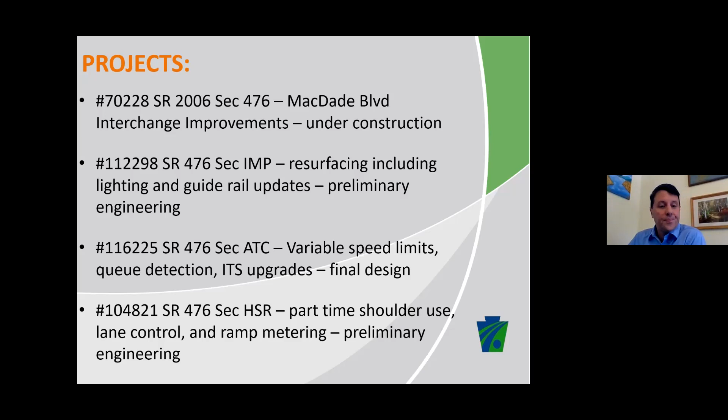All right, let's start one project at a time. First, the MacDade Boulevard project.

This project will put new signals at Bullens Lane. It will remove the northbound off-ramp to MacDade eastbound, and there'll be expansion and signalization of the northbound on-off ramp to MacDade—that's the loop ramp that comes around. Right now you can only go westbound on MacDade; there'll be an option to come to a signalized intersection to go eastbound.

There's also removal of that long pedestrian bridge, and an extension of the 3-lane section on 476 northbound past Bullens Lane—right now it ends prior to that. We're going to extend the on-ramps at both MacDade and Route 1 northbound.

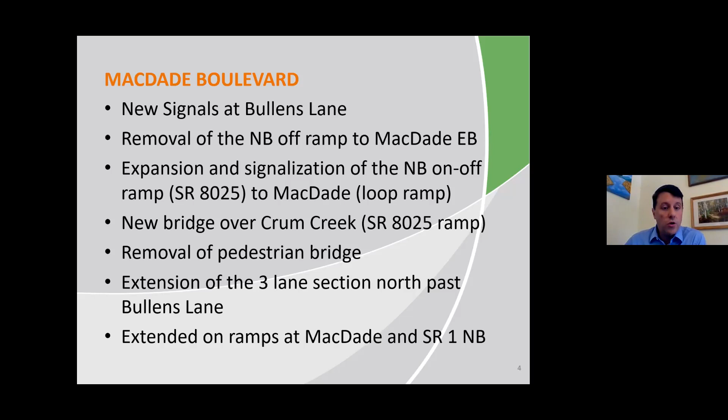So in detail—I don't know if you can see my cursor if I put it there. Okay, that makes this easier. To quickly go through what I was just talking about: the new signals at Bullens Lane are outside of this graphic, but this ramp right here is going to go away.

This big long pedestrian bridge is going to go away. This ramp is going to be expanded. Right now you can only come around and go westbound on MacDade; you'll continue to be able to do that, but we're expanding it so there's a larger signalized intersection here with MacDade Boulevard. So nobody will be able to come off this ramp, get over into the left lane, get on that ramp, and try to get around that northbound backup every afternoon. That whole thing is gone.

One benefit here is that this structure is kind of scary—a lot of people don't want to walk over it. A sidewalk will run down MacDade Boulevard, and there'll be a pedestrian bridge over Crum Creek, buried underneath here, which will connect into the existing sidewalk that goes under this other ramp and proceeds westbound.

Traffic right now has 3 lanes northbound, but the third lane ends right about here. That third lane is going to continue a little further, toward Bullens Lane—I think a bit over a quarter mile further. The idea is to let all the lane switches happen before we drop the lane. We also want to get rid of the backup that extends onto I-95, sometimes both northbound and southbound.

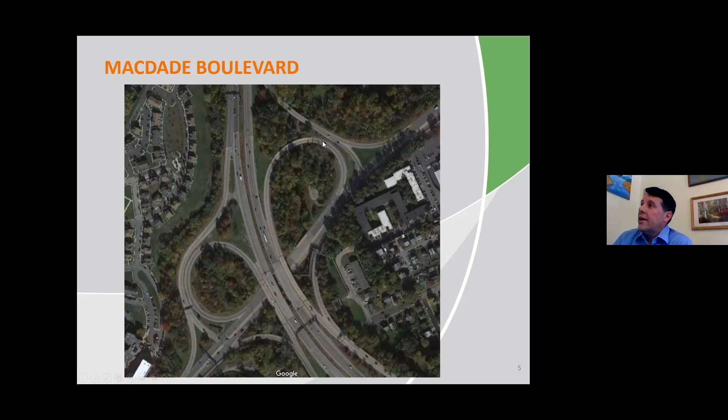The benefit here is that in the PM we should be able to reduce travel time northbound by a couple of minutes—not a dramatic change, but still a change in its own right. The bridge we're replacing is this bridge over Crum Creek. It's a 3-span, which we'll get into now.

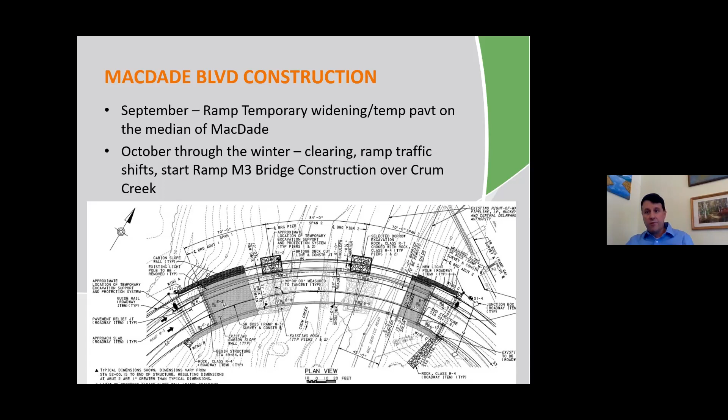Upcoming items of work: this September, we're doing temporary widening and temporary pavement on the median of MacDade, and temporary widening of the ramp. Then this October through the winter, we'll be clearing, doing traffic shifts, and beginning construction of this brand new 3-span bridge. This bridge will be a curved girder with two 70-foot spans on the outsides and an 84-foot center span over Crum Creek.

Questions so far? That's the first project, MacDade Boulevard, which is under construction now. There'll be some paving on the Blue Route that goes along with that, and other incidental construction.

The next one is 476 Section IMP—I assume that means improvement. This is in preliminary engineering now, but quite far along. It involves complete resurfacing of all lanes, ramps, and shoulders from the limits of the MacDade project—we're not going to overlap or pave the same area twice—all the way up to the Schuylkill Expressway. That covers all of Delaware County and up into Montgomery County.

We will finish the guide rail updates that the Interstate Guide Rail Project started, so all the guide rail will be updated and MASH compliant. There will also be lighting upgrades—predominantly using the existing poles and system with LED heads, but there are some gaps in the lighting that we'll be filling in.

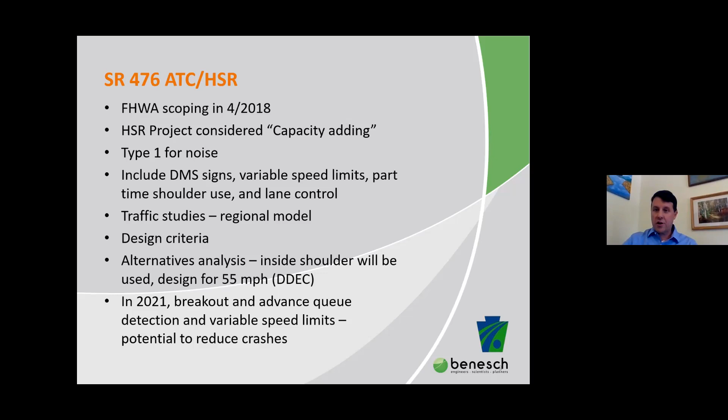During 2021, the decision was made to break out and advance the queue detection and variable speed limits because they have independent value. If we can reduce crashes and the congestion that arises from them, why wait to do the studies for HSR? Our challenge now is to make sure that what we put in for ATC isn't in the way of HSR and we don't end up moving things twice. So ATC is the advanced construction of the variable speed limits and the queue detection.

Limits of ATC are basically from just north of the Schuylkill Expressway all the way down to I-95. On 476 northbound, there will be work that will affect I-95 southbound from Stewart Avenue to the Blue Route, just because we have to warn people that the speed limit's going to change and that sort of thing.

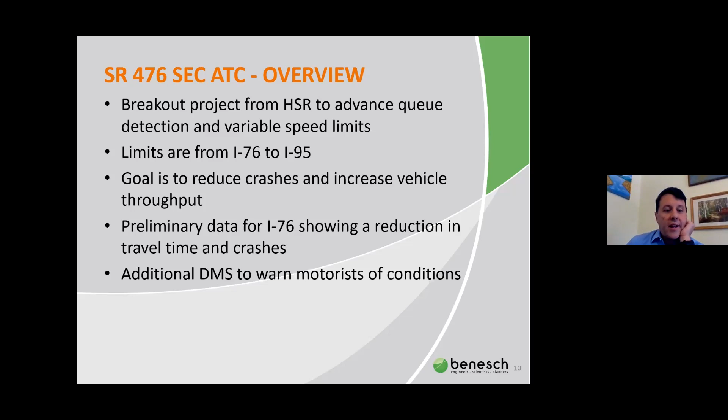Preliminary data, the department has the limits. We're up around Old Gulph Road, all the way down through Lancaster Avenue, West Chester Pike, Route 1, Baltimore Pike, and MacDade. Northbound, we start back near the Boeing interchange, which is Stewart Avenue. Once again, that's for the variable speed limits and queue detection.

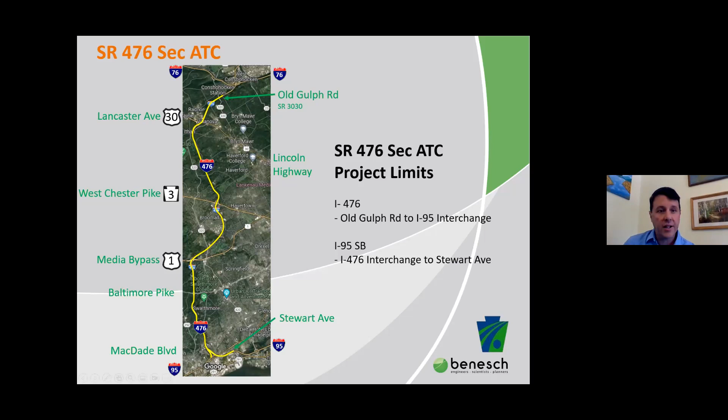What's the benefit of ATC? The design team did crash analysis. The department has lots of safety data for the Blue Route. We've got 7 roadway segments out here that have double the statewide crash rate, predominantly driven by rear end crashes, which is often due to congestion. People go around a turn and traffic is stopped, or somebody slows down faster than somebody else.

Rear end and hit fixed object crashes are 50%, as of the last 5-year count, of the crashes on the Blue Route in Delaware County.

The variable speed limits we found, and there aren't a lot of good examples of this around the country, but Georgia and Wyoming are 2 places we poked around. When variable speed limits were put in on roadways in those 2 states, they saw a 29 to 34% reduction. We are getting to the point now where we have some data from the variable speed limits that PennDOT just did on the Schuylkill Expressway.

As you all know, crashes on all our roadways are up during the pandemic. They rose, so comparing 2021 back to 2017 is difficult.

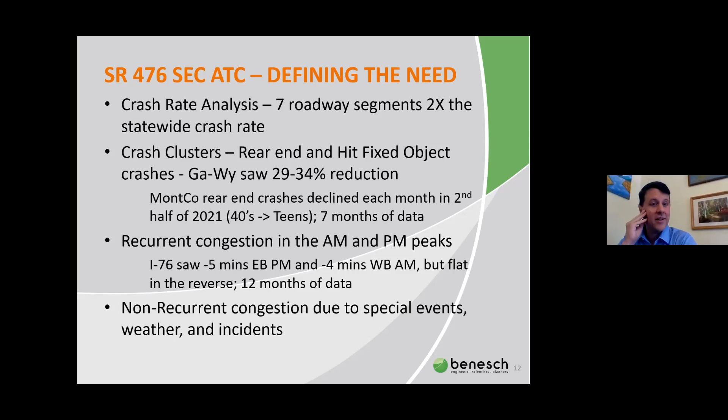Non-recurrent congestion, of course, due to special events, if the Pope's in town or the Eagles, Lord knows, ever get to the Super Bowl or something and it happens to be here. Weather incidents, that's another story.

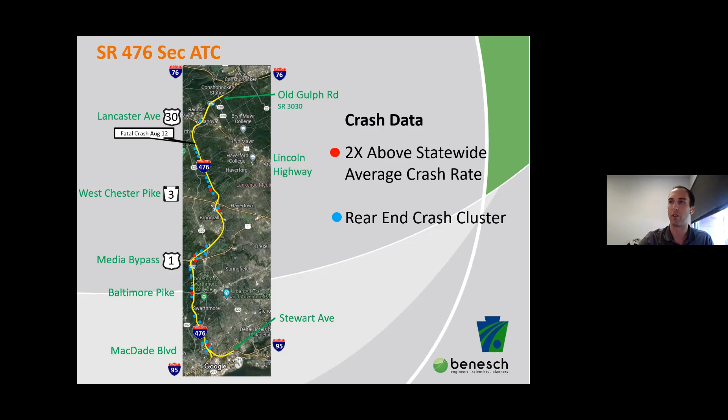So on the next slide here, we'll go through some of the system benefits. Mike touched on some of these, and the data obviously speaks for itself, for what was seen on the 76 deployment as well.

But I guess the benefit of installing a system like this is we want to proactively lower the speed of oncoming traffic coming into a heavily congested area. So with the devices we're going to deploy under this project, PennDOT will be able to tell really when congestion is building and when the density of vehicles is building.

Ahead of that area, they can lower the speed limits progressively, starting at the basic speed limit of 55 miles per hour, lowering it in set increments, and kind of avoid some of that heavy congestion that's due to a sudden change in speed and causes that stop-go condition that ricochets back into the stream of traffic.

So that's one benefit, and the other is reducing crashes, which is the big one. Mike spoke to the reduction that was seen on the Schuylkill. I think we're trying to achieve something similar here, and you'll see when I show the change in speeds on the next slide, on AM and PM peak on average for an entire year. It's pretty telling where some of these areas could use this.

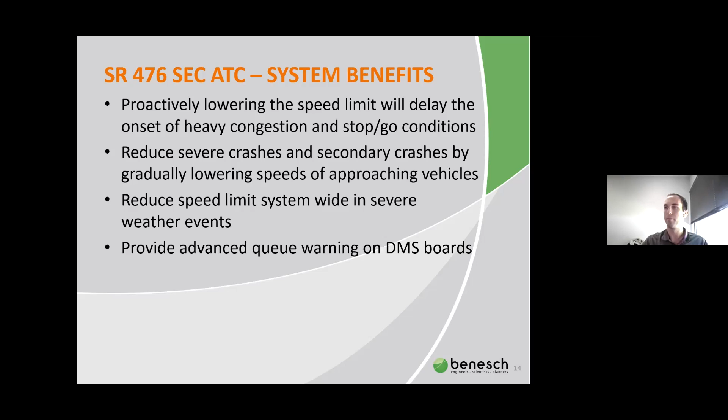On the next slide, I'm going to go through some of the congestion data we pulled for an entire year. We pulled AM and PM peak data for the northbound and southbound direction for our project limits here for an entire year.

During both peaks, for the northbound direction, we're seeing in the AM pockets of slow traffic from the 95 interchange all the way up through Route 1, with a lot more red, slow speeds around the interchange areas. But in the PM peak, you're seeing something similar down near MacDade, and the same around Baltimore Pike and Route 1.

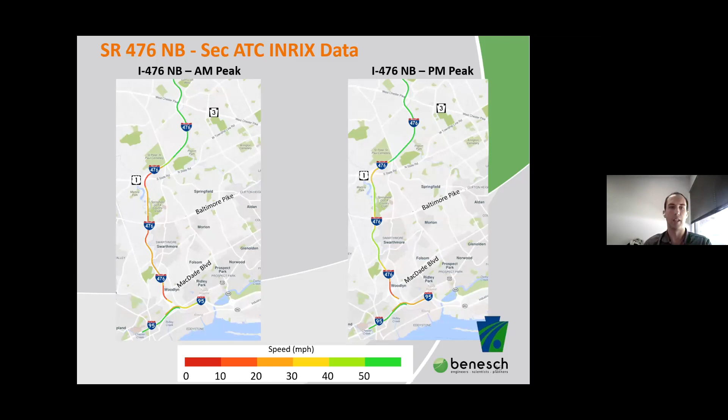And in the southbound direction, on the next slide, we're seeing southbound in the morning a slowdown near Route 1 and Baltimore Pike, but the big piece I wanted to cover was in the PM peak.

Everyone kind of knows this - on a typical day, or even a Friday, you're seeing a really significant reduction in speed as you approach Route 30 and just south of Route 30, all the way down through Baltimore Pike. That's something alarming from the data standpoint, but also looking at the crash data, you can see why there'd be a lot of crash clusters there. You have almost average speeds of 40 to 50 miles per hour, and then you're dropping down to somewhere in the 20 to 30 mile per hour range pretty suddenly.

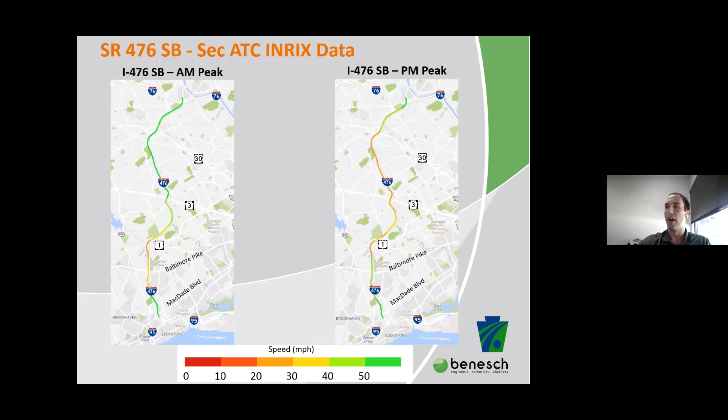So on the next slide, we're going to cover some of the deployments. Mike already covered the limits, kind of Old Gulph Road, Montgomery Avenue area, all the way down to 95, and some devices on 95 southbound.

The pink dots represent dynamic message signs that will be put out there to reinforce the message that there will be potentially stop traffic ahead or a reduction in speed limit ahead. We have them placed intermittently between some of the major interchanges. And then on 95 southbound, to warn drivers coming into 476 northbound that there may be congestion on the ramp there, or a reduction in speed limits, to be advised.

The two other devices there that we don't have shown are - there's many of them, so it would clutter up the map - but based on the limits of the project, we've identified 58 variable speed limit devices spaced at every half mile or less than a half mile to comply with the statutory requirement to make the speed limits enforceable.

And we have 35 vehicle detectors that will be constantly detecting speed and density data of the roadway, which will factor into how the speed limits are calculated and posted on the roadway.

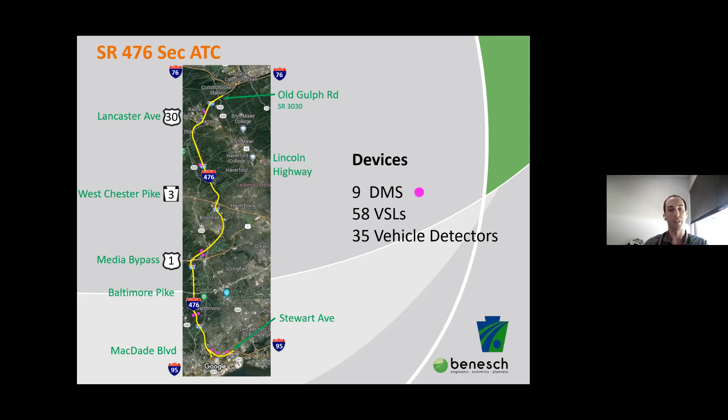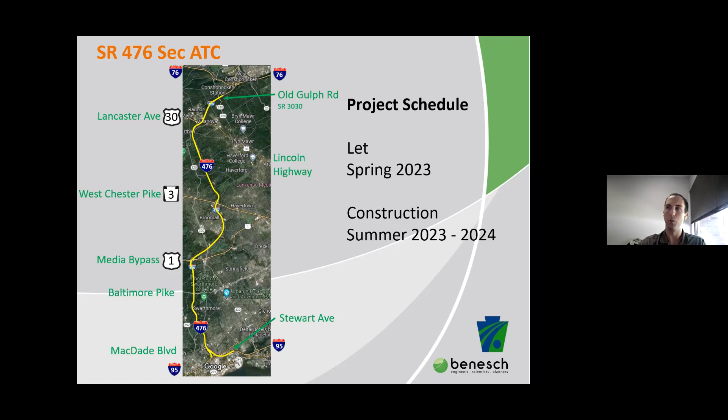As Mike noted, the project schedule has us going to let next spring, and construction starting summer 2023. With that, I'll turn it over to Sandi to cover the hard shoulder running project.

Okay, can everybody hear me? All right, yep, yes.

I just wanted to say, if anybody had any questions about the ATC project, if they wanted to type them in, we can take care of that as well. But everybody's here to hear about the hard shoulder running project.

Everybody knows this area of 476, and it spills over onto 95 southbound. This area of 476 goes from having a 6-lane section, 3 lanes in each direction, down to 4 lanes, 2 in each direction, from Route 3 all the way down to the 95 interchange.

So the project limits are generally from Darby Road, which is just north of Route 3, all the way down through the I-95 interchange. We're also tasked with southbound 95 from Stewart Avenue all the way down through the 322 interchange.

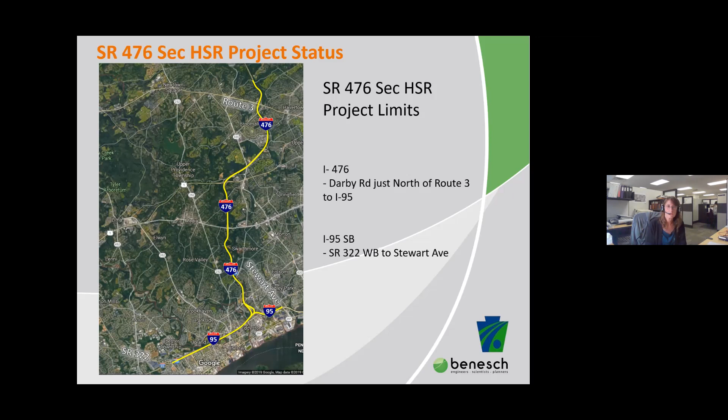As Mike mentioned, we do have the unique opportunity to use the inside shoulders along 476 as part of this project, leaving the outside shoulders for emergency vehicles and emergency access during these peak times.

So normally what you'd see out there is during an inactive condition, that inside shoulder is closed and it will act like a shoulder, just looking like a wide shoulder. Then during the active condition, you'll see a regular 12-foot lane striped out there for use.

We'll be using big gantries, like you see up on bridges, that will show each lane and whether it's open or not—big monotube signs with arrows down over each lane, or if you're not allowed to use the lane, you'll see a big X. So that's what we plan on using along 476.

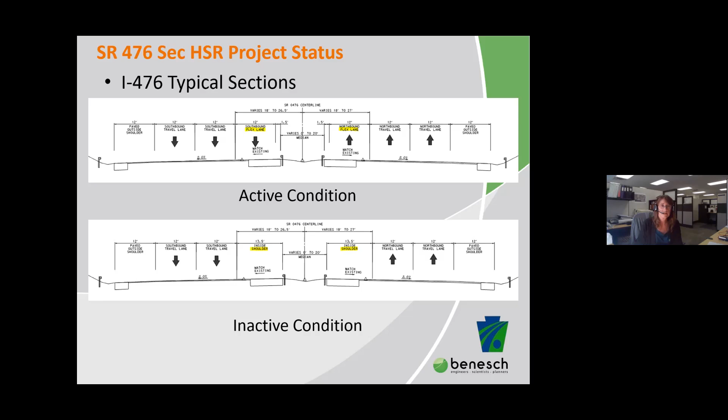95, on the next slide, would be the normal condition of what you're used to seeing out there. I-95 would typically use the outside shoulder as its flex lane. So during normal conditions, what you have out there now is 3 travel lanes and a shoulder. Then during the active periods, that outside shoulder becomes your travel lane.

In order to accomplish this, we all know I-95 in that area is narrow. We don't have the wide medians—we basically just have the concrete barrier down the middle and that shoulder on the side. So in order to accommodate this, we reduce the travel lanes along southbound I-95 from 12-foot lanes to 11-foot lanes.

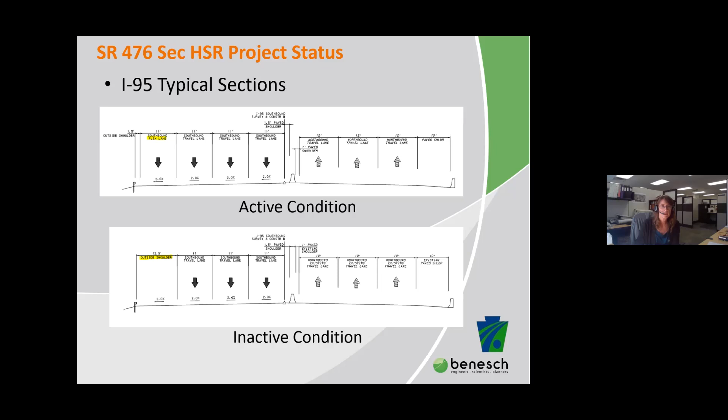And we can go into the next slide.

Of course, in order to make this all work, we actually have to run a lot of traffic models. We ran many different options, figuring out where and what we need to do. What's very interesting is that what works in the morning doesn't necessarily work in the afternoon, and we have to make sure, as everybody knows, that we can't flood 95. So we did a lot of research, or modeling, I should say.

So basically what we found is the northbound flex lane—northbound is pretty straightforward on 476. You can start the flex lane down within the 95 interchange and take it all the way up to the interchange at Route 3.

Southbound, obviously, is a little bit more tricky. We begin the flex lane southbound up at the Route 3 interchange, but in the morning we have to end it just north of Route 1, just to keep us from flooding the 95 area. But in the afternoon, because of the way the traffic changes, we can keep that flex lane open down almost all the way into the interchange with 95.

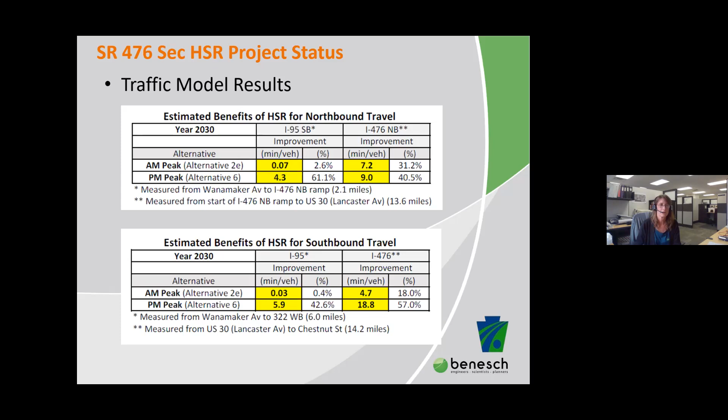So like I said earlier, what we are doing is we've got those big gantries with lane controls so that everyone will know which lanes are open and which aren't. We're deploying the VSL, the variable speed limit signs. Those will be going out with the ATC project. They are basically going to be in the same position that they are for our flex lane project, as well as the variable message signs that you'll see going out there. We will also have cameras and vehicle detectors to help us manage the project.

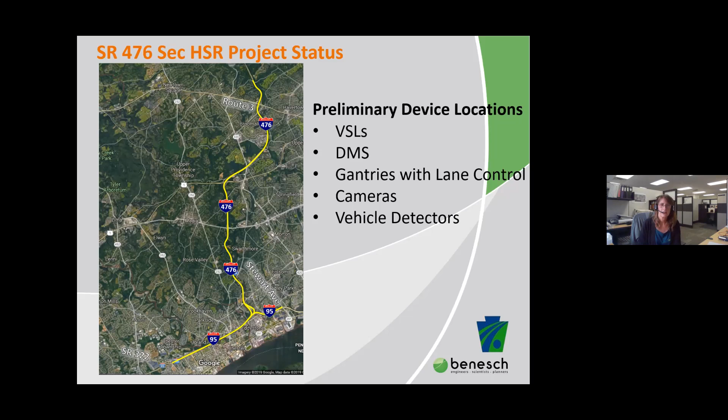And the next slide, because I know we're getting short on time here. So we've got a bunch of next steps for our project. We have some tasks: the safety review and the design field view. We also have the operational analysis to help give PennDOT those cues for when to open lanes and when to close them. The ConOps and the SER, that's all ITS talk for the equipment that's out there and helping PennDOT manage that equipment. We will be going out with task force, and we'll be getting...

I think we encountered some technical difficulties. Am I frozen or is Sandy? I guess. No, just Sandy.

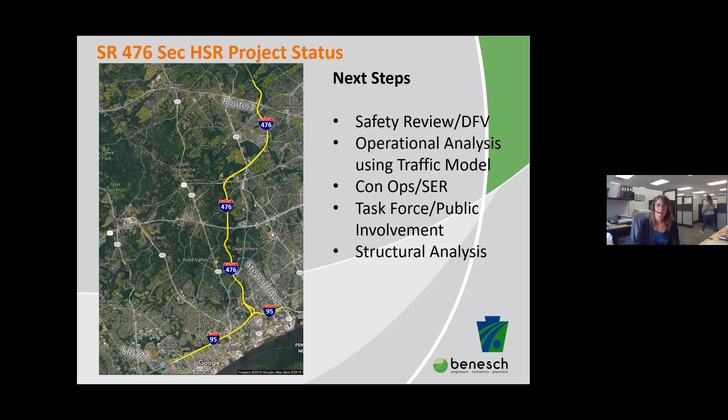Oh, okay. Well, we're currently coordinating with Federal Highway on various structural issues, the ConOps and the systems engineering report. And we're undergoing a structural analysis, particularly of the bridges between MacDade and Baltimore Pike, as well as up over Reed Road, which is in Marple. And then there's a couple of culverts on the Haverford Marple line, which quite honestly, their shoulders aren't wide enough. There are a few areas where we're going to have to add retaining walls to the median. So we're looking at all of that. There's quite a bit that goes into it.

So we have a couple questions for you guys. Go ahead. The first one would be, how would enforcement of the flex lane restrictions be handled? Would there be places where police could patrol conditions? Yeah, the district through the ITS or through the TMC is able to have a record of what the speed limit was at any given time.

So the state police are supposed to be able to enforce this now on the Schuylkill Expressway. That said, the Schuylkill being what it is, I'm not sure to what extent that enforcement is happening yet. I think they're still getting used to that. Speeds on the Schuylkill to an extent are also self-enforcing, at least during peak hours. You can only go so fast. On the blue route, hopefully by the time we get there, the state police will have perfected this a little bit, but there will be places where, if the speed limit's 35 and you're going 55, you're 20 miles over the speed limit. So it's supposed to be enforceable just like any other roadway.

Got it. So here's another question. How long will the flex lanes be open to traffic during the AM and PM peaks on both 476 and on I-95?

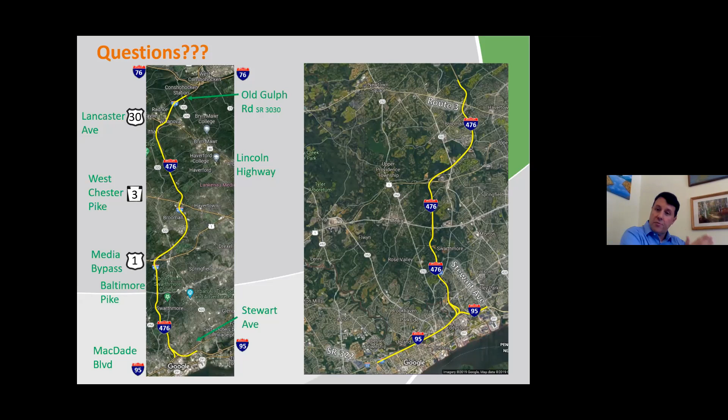We don't have a specific answer to that, and I'm not sure if there is one. It would be flexible, depending on travel volumes, weather conditions. If there's an incident in the left lane, we might get them over to the shoulder and keep the right lane open. We could also use this system if we're doing some construction. We can close a lane in advance and shift people over onto the shoulder if we're working on the right side.

Generally speaking, I imagine we will come to the conclusion that there will be some regular hours on a normal day, where it's sunny and a typical weekday. But that could vary depending on conditions, and if there's a late rush hour for some reason, or if there's something going on down at the stadiums, that might extend it. On Fridays in the summer, I can see it being a little different.

Those were the only - I do have a really quick question. At the beginning, you referenced an extension to the ramp on Route 1. Was that the Springfield exit or the Lima exit? Which - Springfield is Baltimore Pike, Route 1. As part of the job that's under construction now, the MacDade Boulevard project.

We're also up at the Route 1 interchange, the ramp from - if I could zoom in on that - the ramp from Route 1 northbound onto the Blue Route, going up that long hill to Cardinal O'Hara High School. That on-ramp is going to become about 1,000 feet longer. Give or take - I think it's actually 950 feet, but whatever.

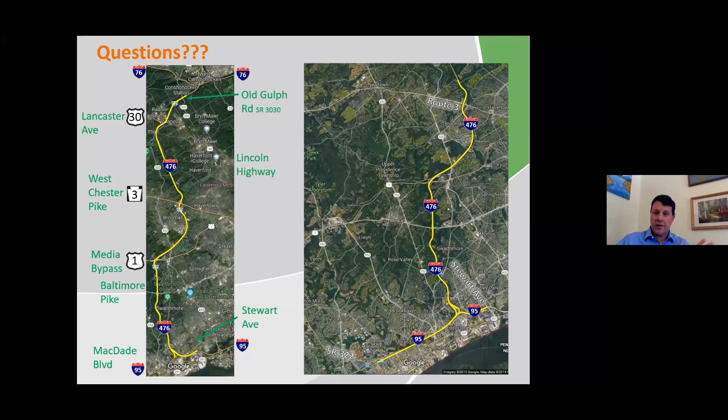So if anybody - wait, I think we just got a last question in there. Okay, here's one: for the Reed Road Bridge, will you have to expand it to accommodate a third lane? Yes. Whether that means widening into the median or some more substantial improvement, we're looking at that now. We're not looking at moving it or making it longer, but the width isn't there.